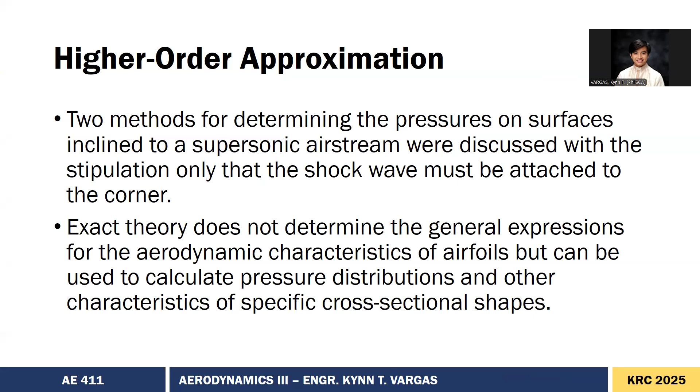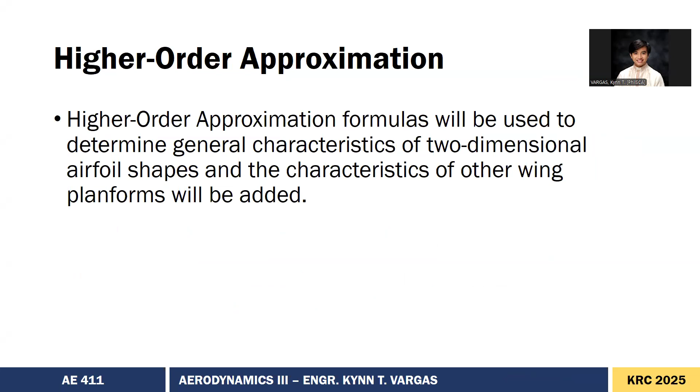For higher order approximations, this takes into account not just our assumptions that the flow must be attached, but what actually happens, which determines the general characteristics of two-dimensional airfoil shapes and other characteristics of wing planforms. So that's what happens there.

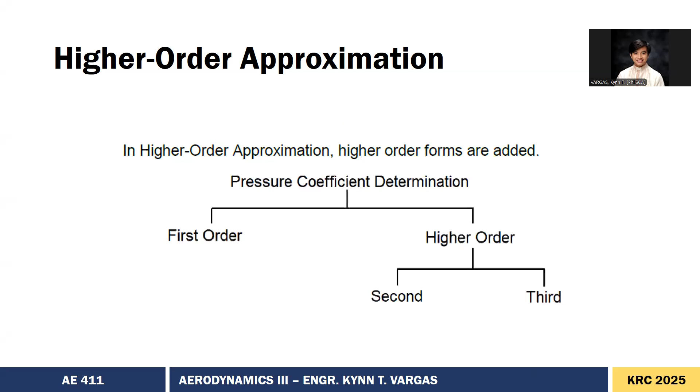In higher order approximation, higher order terms are added, such as the second and third. So the application of pressure coefficient can be used to determine important aerodynamic characteristics. The practical approach is to use the second order approximation, which is more accurate than the first order method, but much simpler than the third.

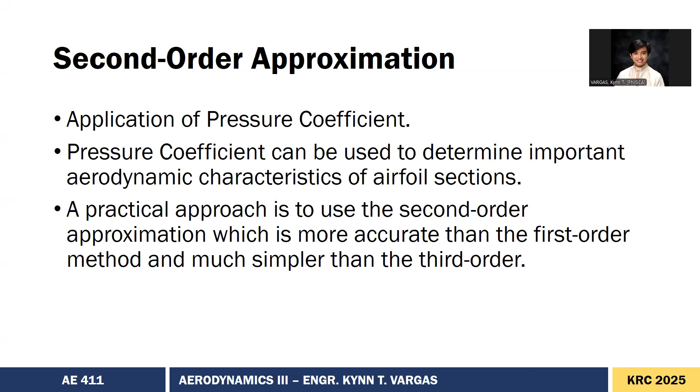It's just sequential. So now, same as before, input this into Excel.

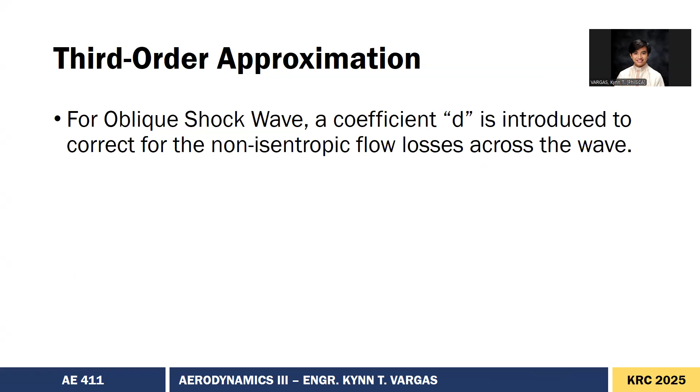For the oblique shock wave, a coefficient D is introduced for correction in the non-isentropic flow losses across the wave. In the earlier formulas, those were just approximations, but what about the losses? That's where D considers them.

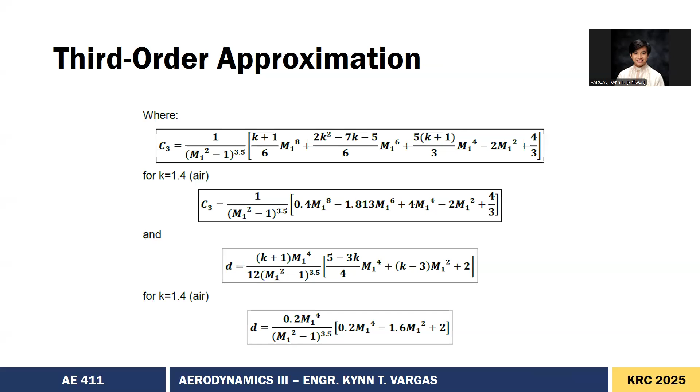Now this is also for the lift and drag of a flat plate. Same goes for the aerodynamic characteristics of a two-dimensional symmetrical double wedge airfoil, and for the pressure differences over the front and rear halves of the airfoil.

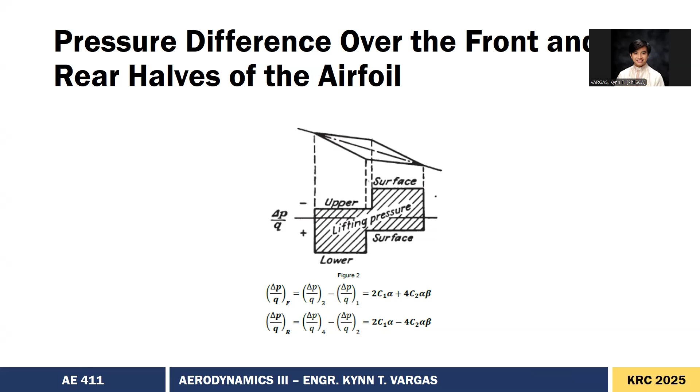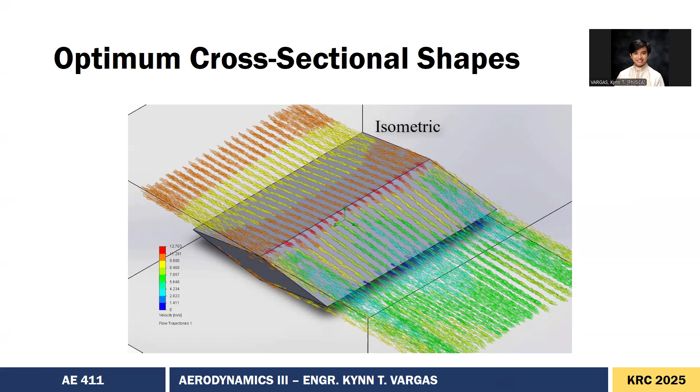This is already from Aerodynamics 1, just a review. So, moving the point of maximum thickness forward or aft changes the lift curve slope. Likewise, making the sectional shape unsymmetrical, such as adding camber, does not affect the lift curve slope, but displaces it, so it's not zero at zero angle of attack.

Now, the drag coefficient is a function of the sum of the squares of the leading and trailing edge semi-wedge angles, and is minimum when symmetrical. So you have a choice to make, what do you want to happen?

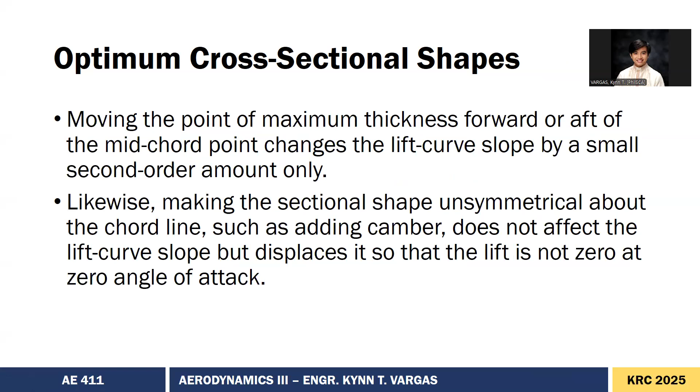Unsymmetrical ba para ma-displace natin at zero angle of attack? Or gawin mong symmetrical para sa minimum drag? Where drag increase in fore and aft asymmetry is greater than the lift increase. So, ang mas pinapaboran natin ay yung completely symmetrical. Masyadong malaki yung losses natin when magiging asymmetric just for a zero lift angle of attack.

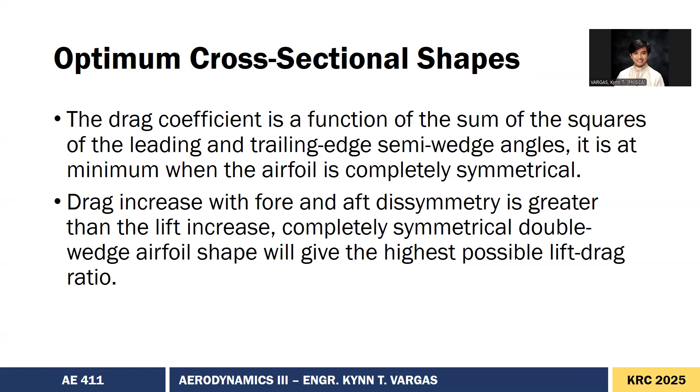So, ang gusto talaga natin for supersonic is minimum drag. So, in conclusion, ang theoretical natin is the pinaka-symmetrical. So, ano yung pinaka-optimum contour na pwede natin? It's either the double wedge, the biconvex or double circular arc, and the modified double wedge. So, may mga kanya-kanyang advantage and disadvantage yan. So, ngayon, isa-isahin natin yun mamaya.

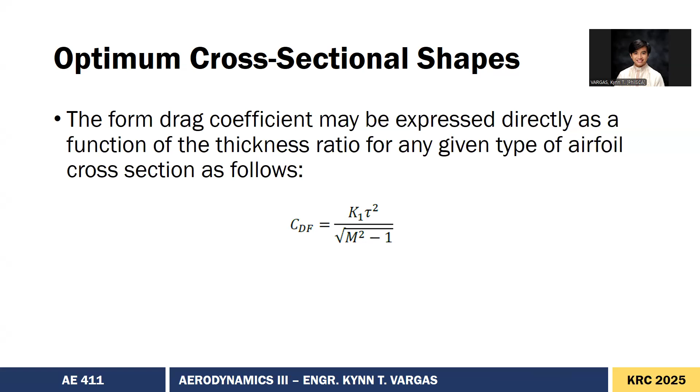So, the form drag is expressed in the function of ito. Now, for the double wedge type of cross-section is optimum shape. Double wedge. Because it has the least drag for given thickness. However, strength must be considered because those sharp points are stress points.

Ito yung double wedge. Tandaan nyo, ang bintana ng eroplano ay hindi rectangular or square. Wala siyang corner. Siya ay pa-oblong. Kasi stress points ang mga corner. Kaya, pinapaboran din is yung mga pabilog or mga oval shapes, mga ellipse.

Now, ano yung isang shape na pwede? Na symmetrical din. So, meron, same ng itsura sa double wedge, but has given a room for allowable stress. Where the net result is yung drag is less than those of the double wedge airfoil. So, ano yun?

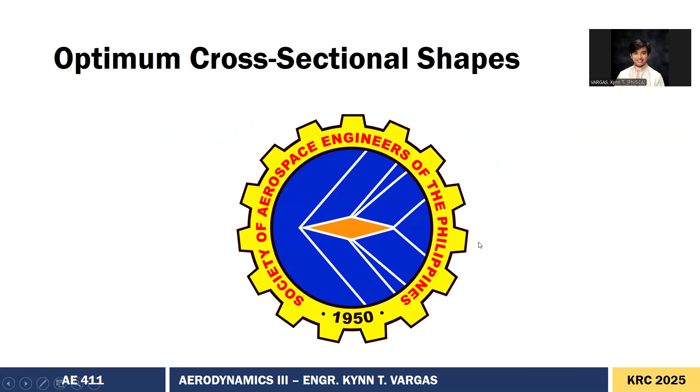So, for now, ito yung optimal natin. It's the diamond airfoil. Kaya yun din yung ginagamit sa logo ng SAEP. Diamond airfoil yun. So ngayon, ano yung isa pa na kailangan, na pwede natin gamitin?

The optimum, another optimum is the biconvex form. So from the standpoint of drag per unit strength, the biconvex type may be considered to be optimum practical airfoil cross-sectional shape to give the least drag per unit stress.

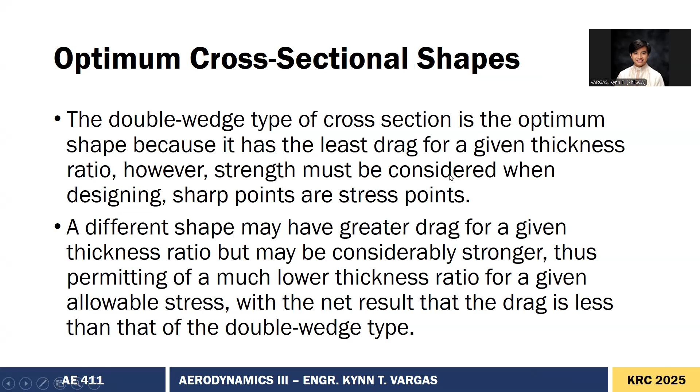So magkaiba sila ng metrics. Yung double wedge is least drag for given thickness and yung biconvex naman which is ito, yung biconvex is anong ratio naman? Drag per unit strength. So ang sukatan ng, ah, double wedge ay kapal pero ang sukatan naman pagdating sa biconvex ay not kapal pala, kapal or nipis, and

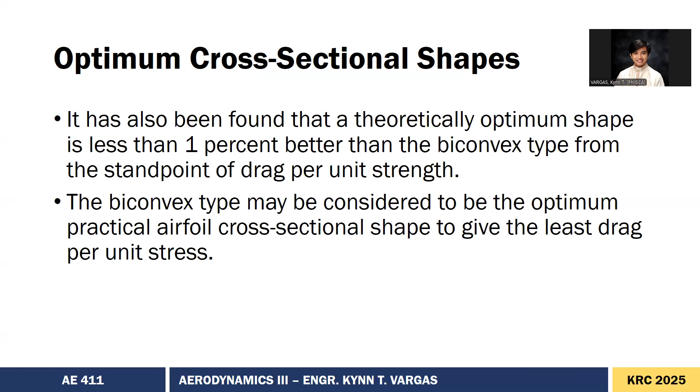dito naman ay strength. So, kung gusto mong mas manipis na design, mag-opt ka for a double wedge airfoil. But if you want it to be stronger, syempre, ipipiliin mo is yung biconvex. Nakadepende na lang siya sa application.

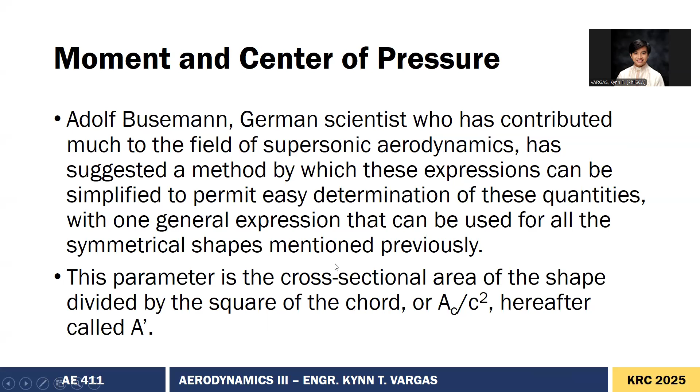So, sample problems, kita naman na dito yan. Same with moment and center of pressure. Now, Adolf Busemann is a German scientist which has contributed to the field of supersonic aerodynamics. Same with Jacob Ackeret. Pero dito, kay Adolf Busemann, is yung kanyang mga studies with regards to the supersonic airfoils.

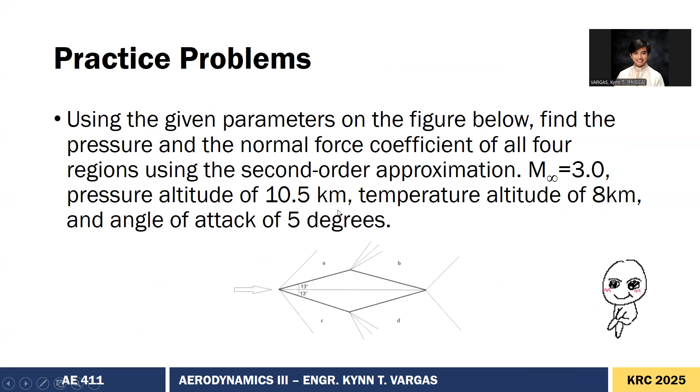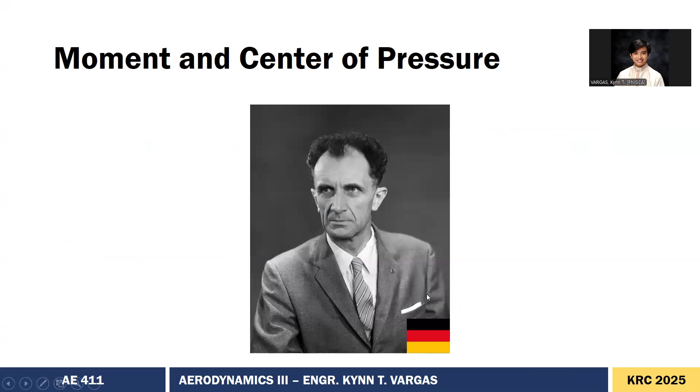So magkaibang shape. Pero ano lang yung dapat parehas? It's the area over the chord. Itong A over C. So, regardless of sizing, ito yung tinatawag natin na sizing optimization. Regardless of size, as long as yung, and even itsura, basta yung area niya, divide by the chord squared is parehas, magiging parehas yung moment coefficient nila.

So, this theory indicates that the center pressure does not vary with angle of attack. Kaya nga hindi din natin siya concerned to begin with. Bakit mo pa aalalahanin yung lift increase at yung angle of attack increase? Ang gusto nating mangyari sa supersonic, minimum drag.